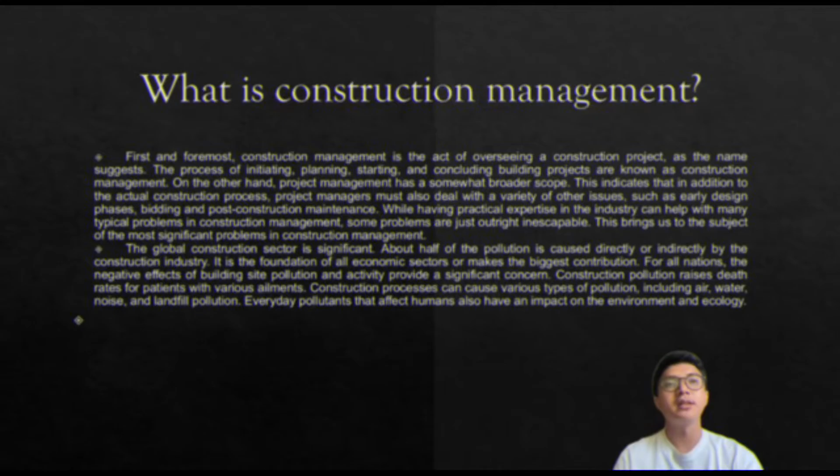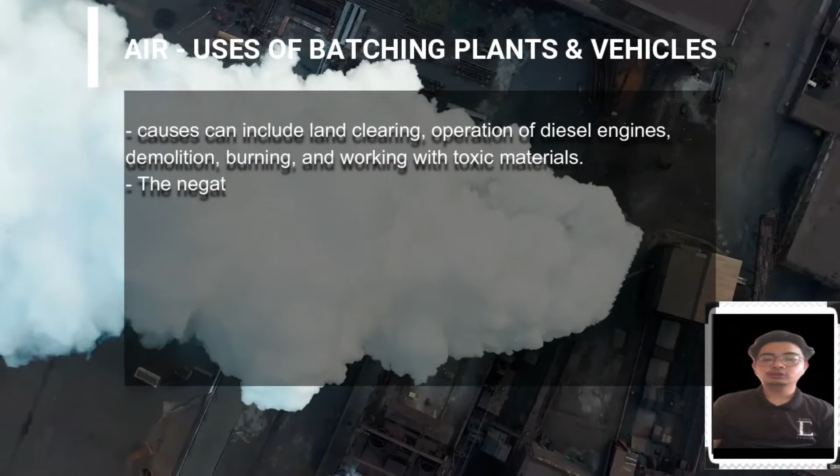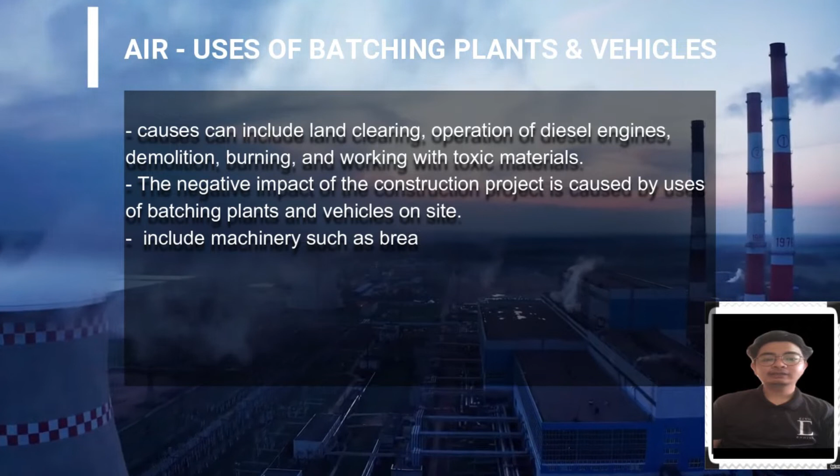Construction is a relatively high contributor to air pollution, and its causes can include land clearing, operation of diesel engines, demolition, burning, and working with toxic materials. At the time of construction, various types of greenhouse gas are emitted, and this toxic gas mixes with the environment more easily. The negative impact of the construction project is caused by uses of batching plants and vehicles on site.

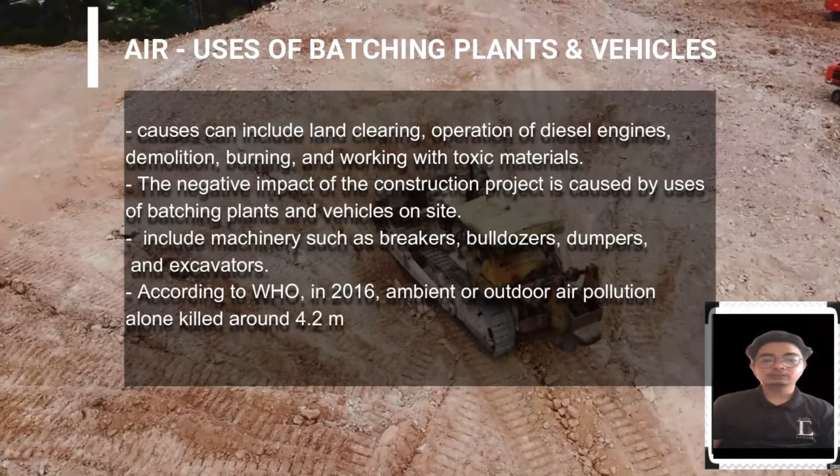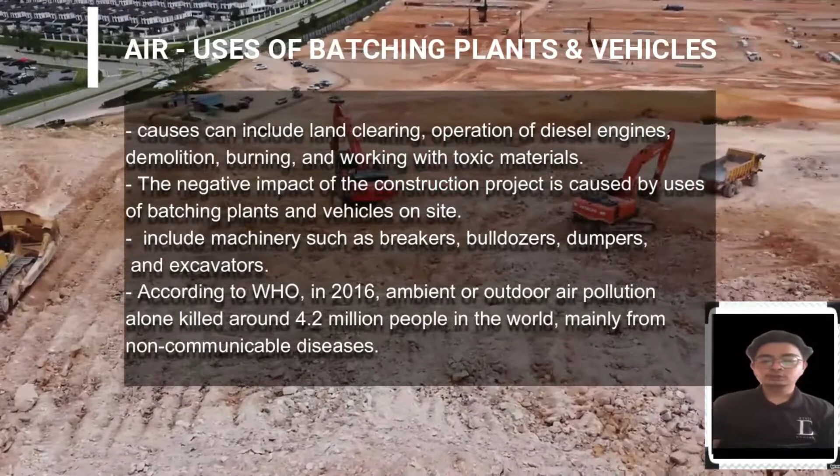This depends on the site activity but can include machinery such as breakers, bulldozers, dumpers, and excavators. The government does not control equipment used on construction sites to the same extent as it does other vehicles. Due to the scale of many construction projects, equipment is often running and polluting for a long time.

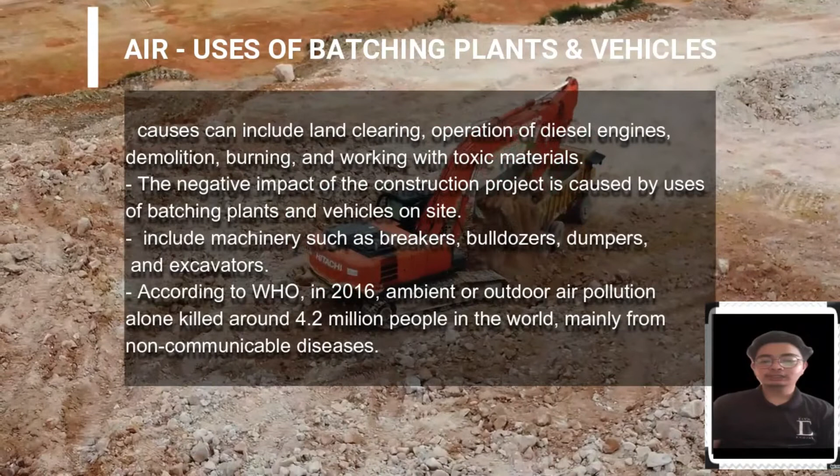As a lot of this heavy machinery and other vehicles on site operate on diesel engines, they release pollutants to the air. This includes the gases carbon monoxide, carbon dioxide, nitrogen oxides, and hydrocarbons. According to WHO in 2016, ambient or outdoor air pollution alone killed around 4.2 million people in the world, mainly from non-communicable disease.

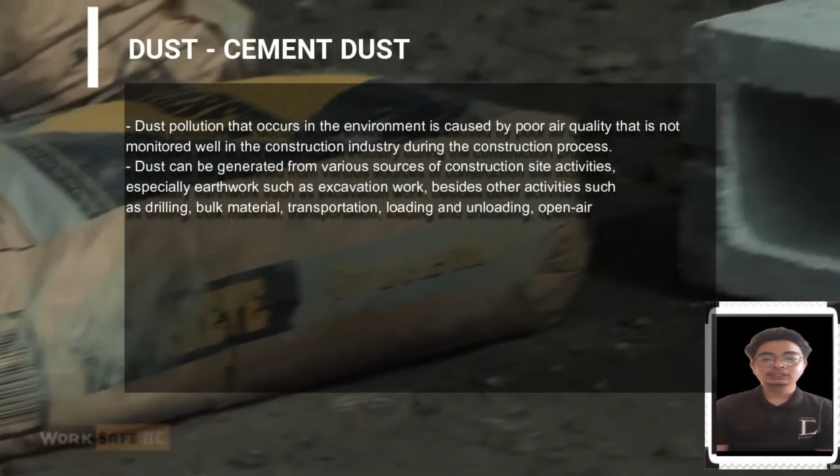Dust pollution that occurs in the environment is caused by poor air quality that is not monitored well in the construction industry during the construction process. A significant source of pollution, accounting for 4% of particle emissions, is the building industry.

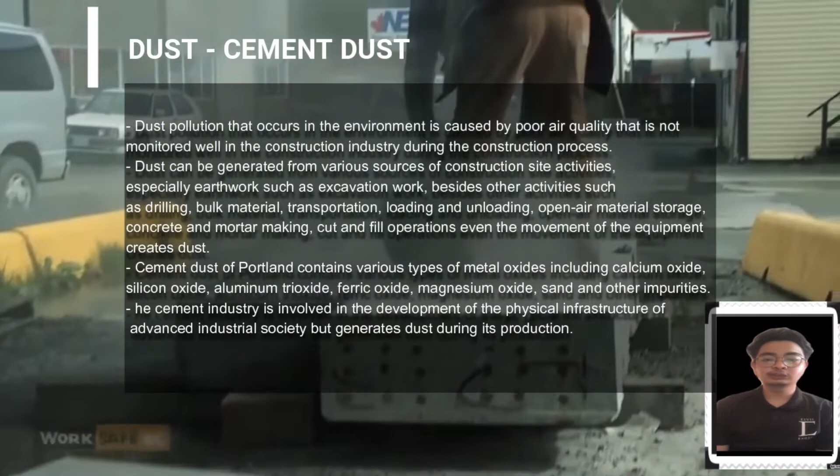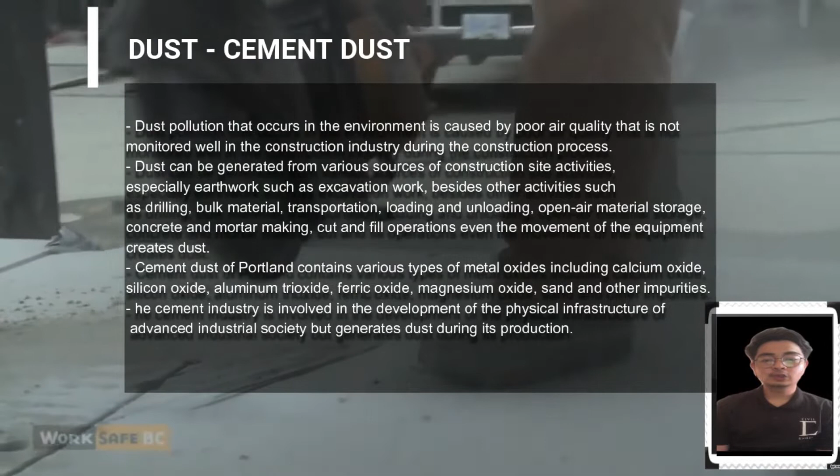Dust can be generated from various sources of construction site activities, especially earthwork such as excavation, besides other activities such as drilling, bulk material transportation, loading and unloading, open air material storage, concrete and mortar making, and cut and fill operations. Even the movement of equipment creates dust.

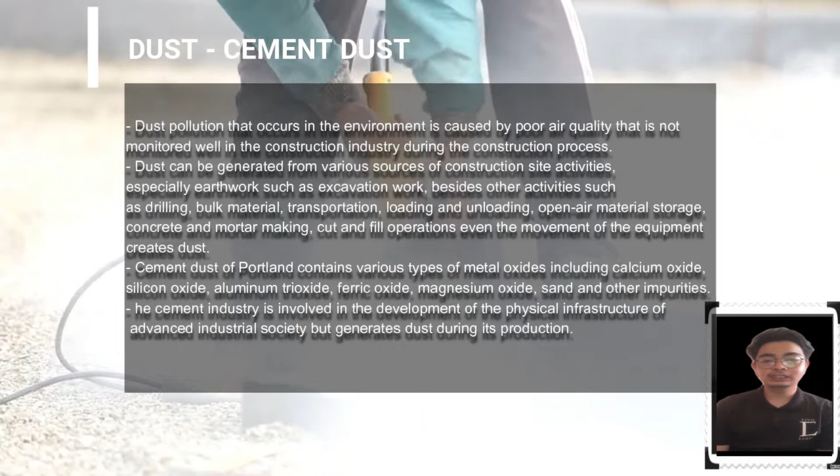Cement dust of Portland, contains various types of metal oxides including calcium oxide, silicon oxide, aluminium trioxide, ferric oxide, magnesium oxide, sand and other impurities. Some working environments still expose workers to cement dust.

Many people are also exposed to cement dust particles in their living environment, such as near cement production facilities and areas under construction. The cement industry is involved in the development of the physical infrastructure of advanced industrial society but generates dust during its production.

Thank you, Muhammad Ashraf.

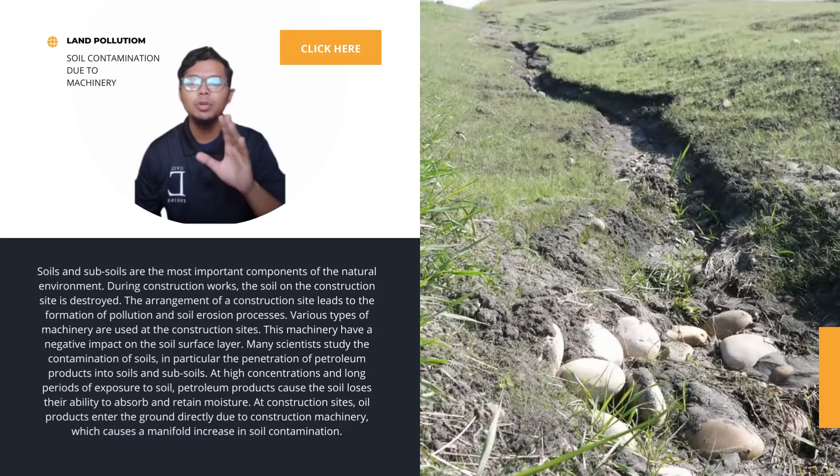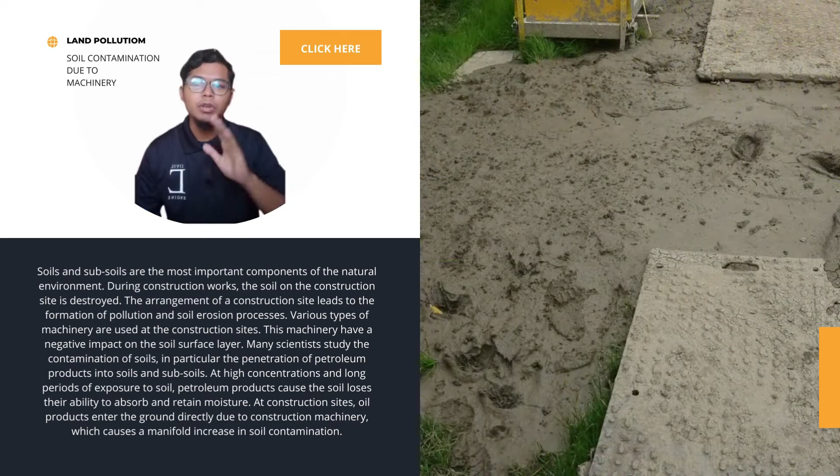I will continue with land pollution, which is soil contamination due to machinery. Soil and subsoil are the most important components of the natural environment. During construction works, the soil on the construction site is destroyed. The arrangement of the construction site leads to pollution and the soil erosion process.

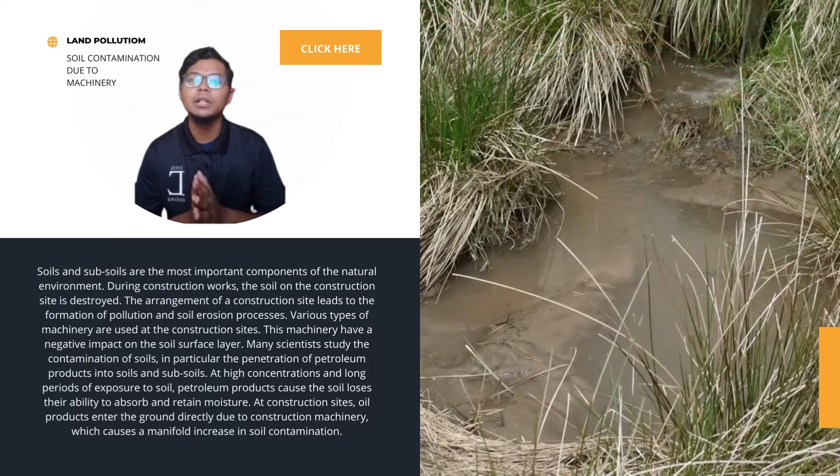Various types of machinery are used at the construction site. This machinery has a negative impact on the soil surface layer. Many scientists study the contamination of soil, in particular the penetration of petroleum products into soil and subsoil.

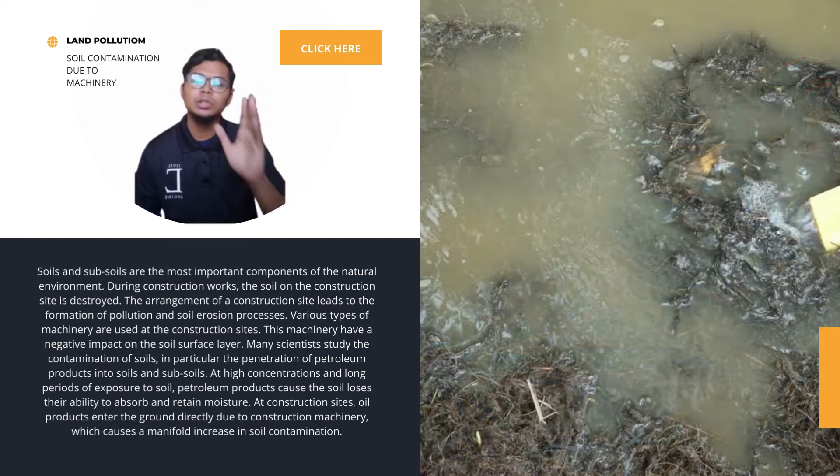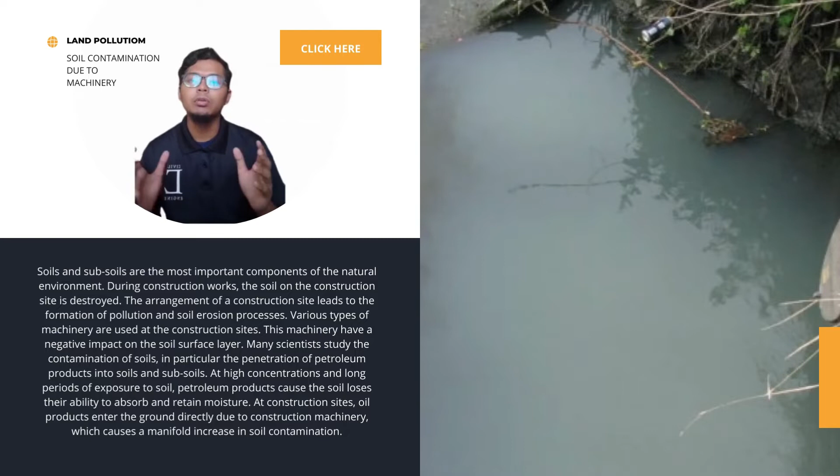At high concentration and long periods of exposure, petroleum products cause the soil to lose its ability to absorb and retain moisture. At construction sites, oil products enter the ground directly due to construction machinery, which causes a manifold increase in soil contamination.

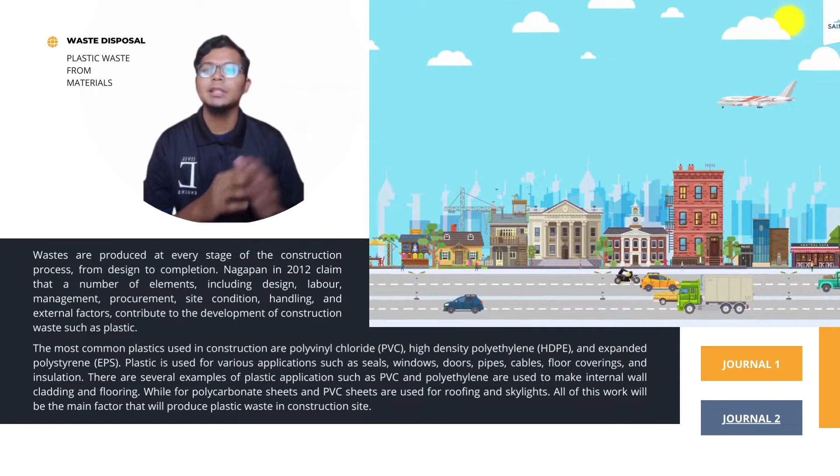For waste disposal, we will focus on plastic waste. Waste is produced at every stage of the construction process, from design to completion.

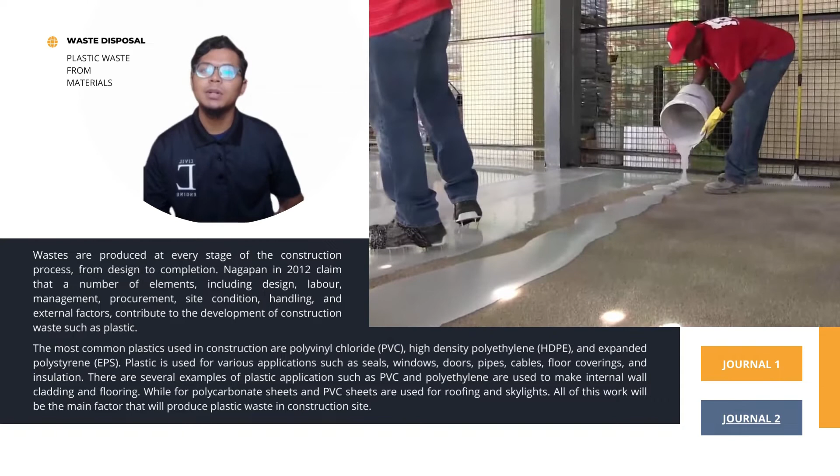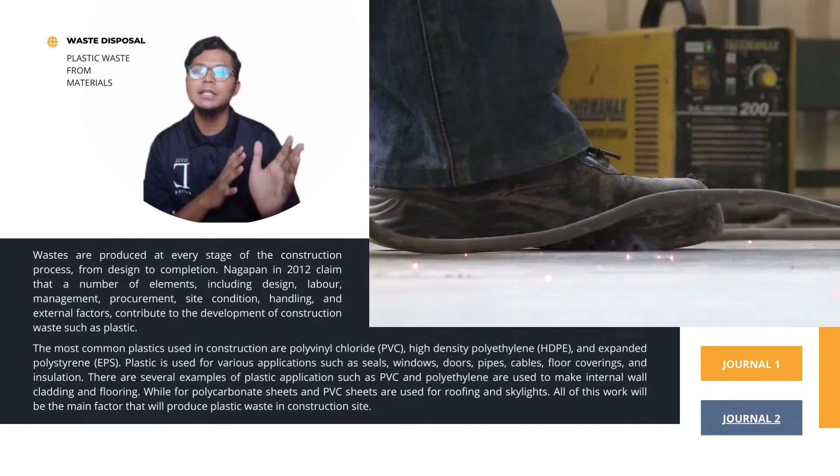Nagapan in 2012 claimed that a number of elements including design, labor, management, procurement, site condition, handling, and external factors contribute to the development of construction waste, such as plastic. The most common plastics used in construction are PVC, HDPE, and EPS. Plastic is used for various applications such as seals, windows, doors, pipes, cables, floor coverings, and insulation.

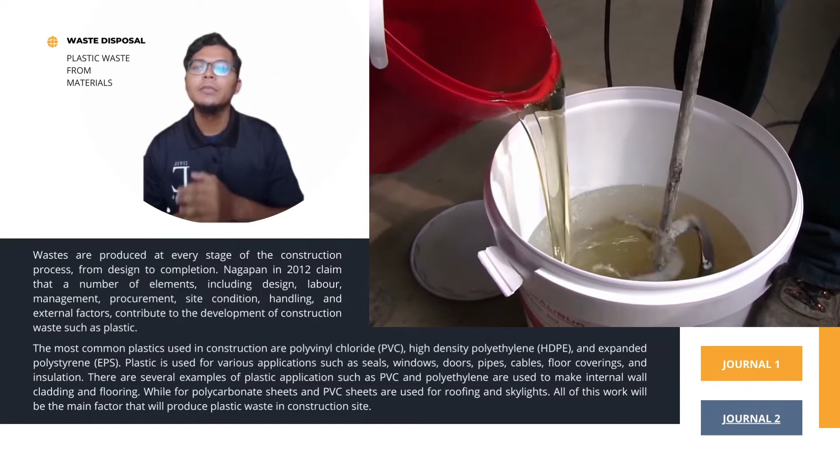There are several examples of plastic applications such as PVC and polyethylene that are used to make internal wall cladding and flooring, while polycarbonate sheets and PVC sheets are used for roofing and skylights. All of this work will be the main factor that will produce plastic waste on construction sites.

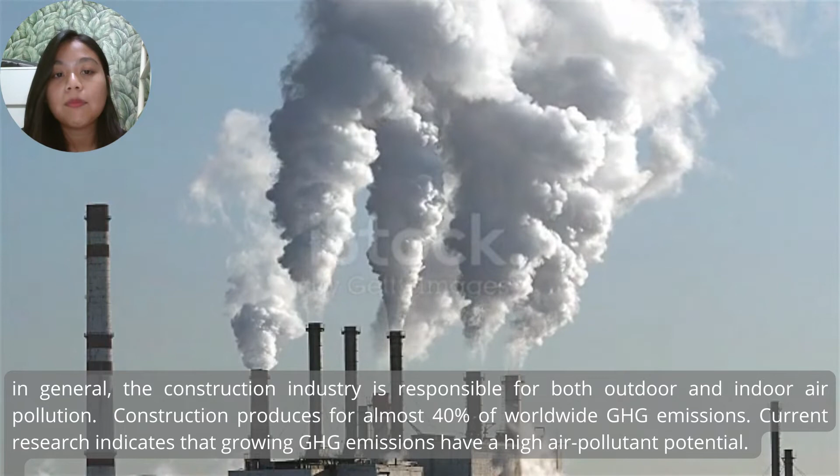Solution on air pollution. In general, the construction industry is responsible for both outdoor and indoor air pollution. Construction produces almost 40% of worldwide GHG emissions. Current research indicates that growing GHG emissions have a high air pollutant potential. In order to considerably cut GHG emissions in the construction sector, an increasing number of countries have implemented rules to improve building energy performance in recent years.

For diesel engines, the best approach to reduce this emission is to use low-sulfur diesel in all equipment and engines, as well as to upgrade all equipment with the most recent particle filters and catalytic converters.

Solution on land pollution. The increasing industrialization of the world over the previous centuries has resulted in significant soil contamination on a worldwide scale. Therefore, the government needs to strengthen policies that manage pollution sources. In addition to limiting pollutants, everyday environmental monitoring should be improved. Companies in defined areas should perform soil studies at least once a year and report the results to the public to ensure accountability. People, businesses, and companies who violate policies should face the harshest penalty from the government.

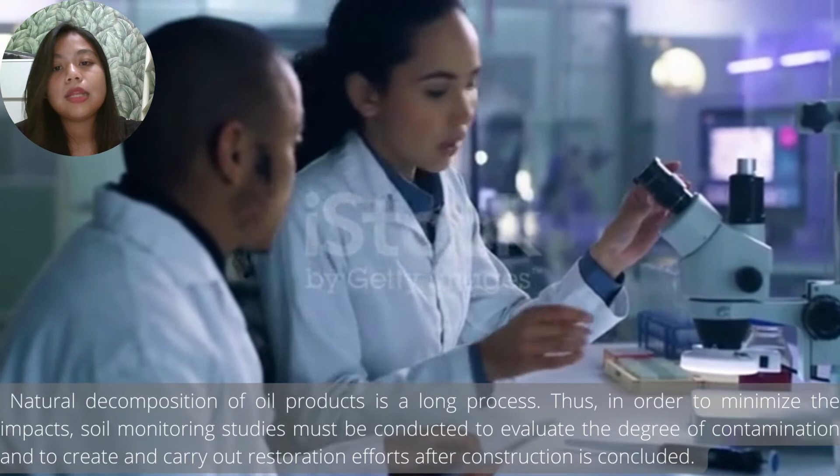Natural decomposition of oil products is a long process. Thus, in order to minimize the impact, soil monitoring studies must be conducted to evaluate the degree of contamination and to create and carry out restoration efforts after construction is concluded.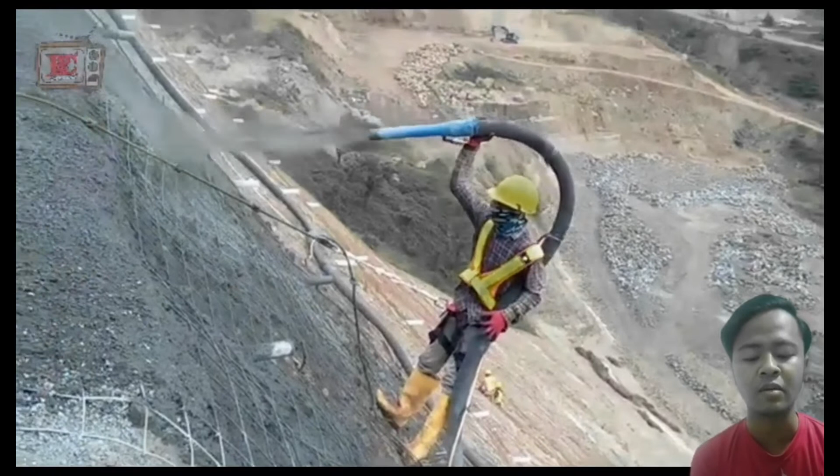Shotcrete is one of the construction activities, a method of applying concrete that is projected at high velocity onto a vertical or overhead surface, and shotcrete activity can produce lots of dust. One of the best ways to control dust in construction activities is with the help of water. Based on a study by Peng Cheng Li and others on the dust suppression technology of shotcrete, they concluded that wet mixed concrete can reduce more than 90% of dust concentration in the air on the construction site. There are 2 pieces of equipment mentioned in this article to help reduce the dust during loading and spraying activities.

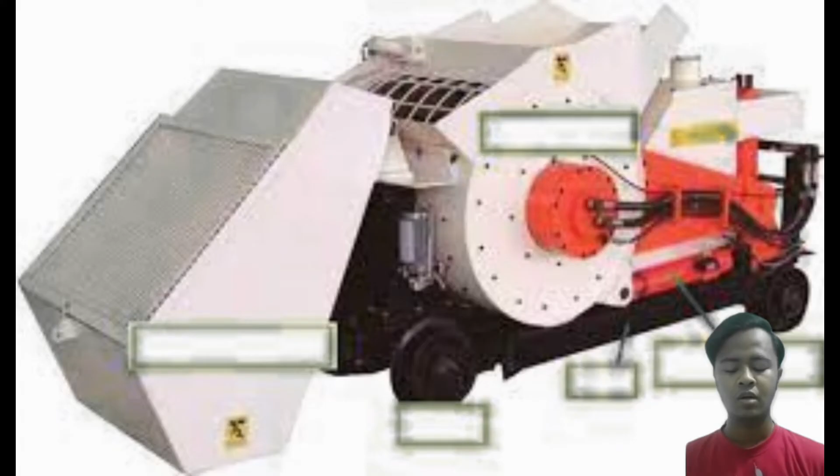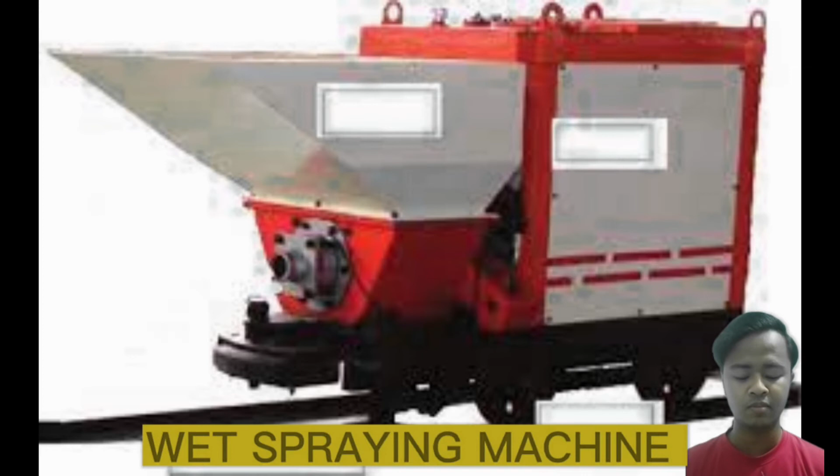The first equipment is the wet mixing and feeding machine. This machine can help to achieve sufficient bond between water and the other materials. It also improves the viscosity of fresh concrete, thus making less dust in the air. The next equipment mentioned in this article is the wet spraying machine. This machine can operate in a small or tight space, meaning that this machine can be used in any place.

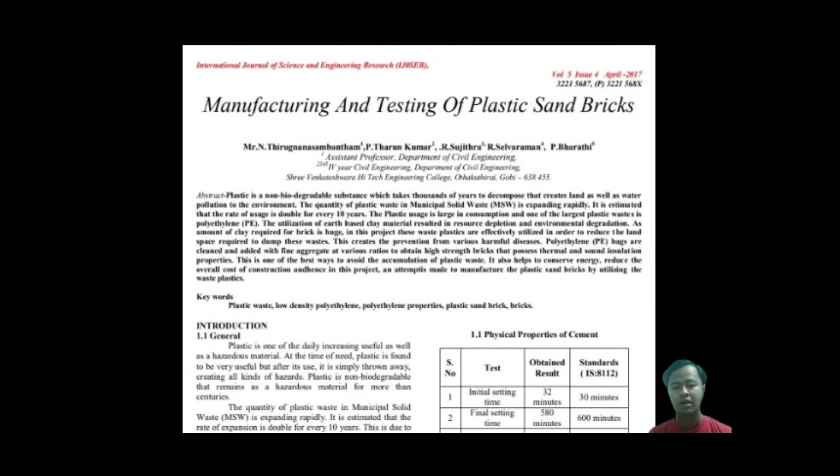Some of the construction materials and their packaging are made out of plastics. And of course, some of this plastic will end up as waste. Plastic waste disposal on construction sites can now be reduced by recycling these plastics into a new material, which is plastic brick. A study has been conducted by Mr. N. Thirugnanasambantham and others. The objective of the study is to determine the advantages of plastic brick compared to fly ash brick. And the data shows that the plastic brick has higher compressive strength and absorbs low alkali compared to fly ash brick.

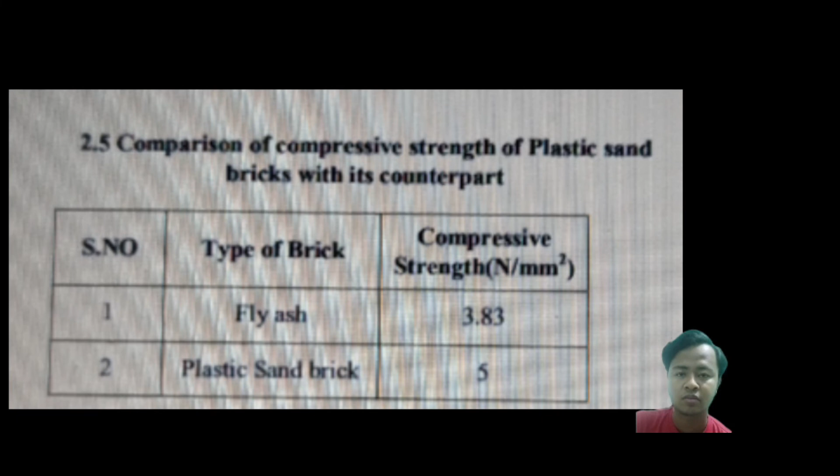In conclusion, a good engineer needs to practice good management skills so that they can ensure the safety of the earth, the workers and other people, and we also need to play our role to keep the earth safe.